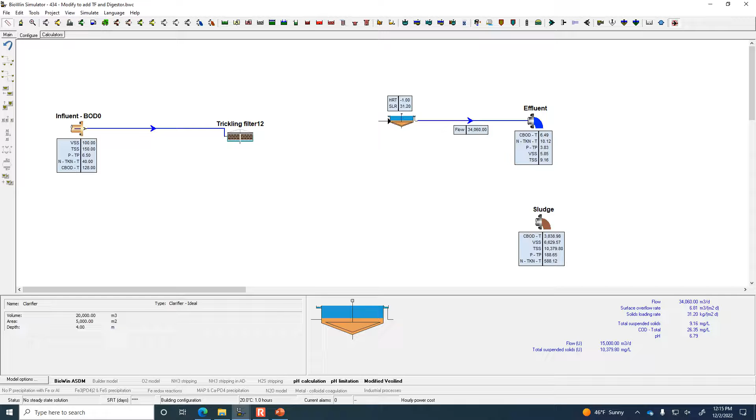So let's put the pipes in that are needed to the trickling filter, and then the underflow from the trickling filter up to the influent of the clarifier. Now, since I deleted that splitter, because we're not recirculating sludge, we have to connect the underflow from the clarifier directly to the sludge. And then I'm going to just drag that pipe down so that it's not in the way of the annotation I had added before. So your system should look approximately like this.

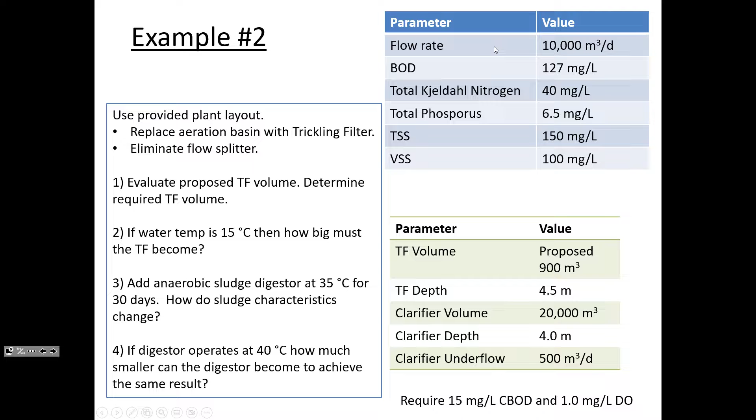The handout I gave you specified the parameters for the trickling filter that we want to do. So, it's basically all the same inflow except for the flow rate we need to adjust. I think previously it was in the 30-something thousand cubic meters per day. Let's reduce the flow rate down to 10,000 cubic meters per day. So that is an adjustment that we have to make here in the influent. Double click on it. Edit data, and it was 34,060 before. Let's dial down this flow rate to 10,000 cubic meters per day. All right.

Now, we had all of the pipes annotated, but when we deleted the pipes, those annotations were removed. So if we want that back again, we'll have to manually add it. So once again, I'm specifying below, tag the parameter, and what we want to have is the flow annotated. So add that to each of the pipes just so we can keep straight. I guess this system isn't quite as complicated as the flows since there's no recirculation, but it's still nice to see where things are going when there is a split. And we do split the flow going into that ideal clarifier. There's the underflow versus the overflow. All right, so we changed the flow to the influent.

If we look at the parameters here in this new problem where we've got the trickling filter, we want the volume to be 900 cubic meters. So go into the trickling filter by double clicking on it, and it has some default assumed value. I think that's 2,000 cubic meters. Let's see what's going to happen if we have 900 cubic meters. And we'll leave the depth of the filter the same.

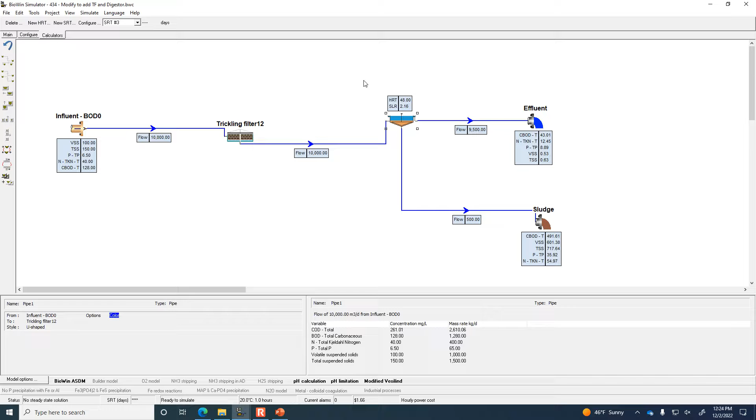Now, with this 900 cubic meter reactor, and we're leaving the clarifier volume the same, 20,000 cubic meters. The only thing we needed to change on the clarifier was the underflow. We're trying to get 15 milligrams per liter of BOD, and we want the water coming out of the trickling filter to be at least 1 milligram per liter of dissolved oxygen to make sure that inside of the clarifier things don't go anoxic. So let's calculate.

So under the Simulate tab, Steady State Balance, and since we're starting from scratch basically, like we haven't already done a previous calculation run with the trickling filter, we'll start with the seed file rather than with the current values. So starting with the seed, begin the calculations, and fingers crossed it can find a solution here. It did within 3 iterations.

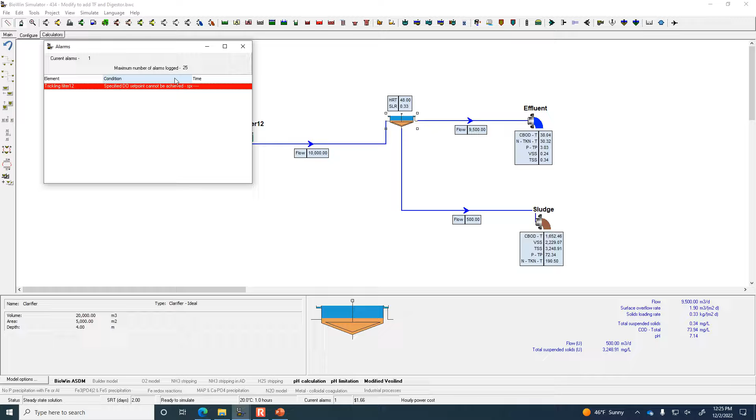Okay, but we've got alarms. Sometimes it just says solution found, but here it says solution found with alarms. So it's detecting that there's some sort of an issue, and we get this pop-up thing here saying the specified dissolved oxygen set point cannot be achieved. So something's up with dissolved oxygen. Let's hover over the trickling filter and see what we can learn.

If you see the cursor over the trickling filter, it's saying that the dissolved oxygen at the filter top is 4 milligrams per liter, but then 1.31 milligrams per liter in the middle of the trickling filter, and by the time the water gets down at the bottom, there's only 0.44 milligrams per liter of dissolved oxygen. So that's too low. The water going into the clarifier has so little dissolved oxygen that the rest of it will be consumed in the clarifier, and we'd have a layer of anoxic sludge at the bottom of the clarifier. So we need to make changes.

Either we need to increase the rate of the blowers that are providing oxygen into the trickling filter, or we need to increase the size of the trickling filter. And I think that we ought to go with the latter, because if you check the BOD of the effluent, it's also not meeting our required standard of 15 milligrams per liter. So this solution is a fail for 2 reasons. We haven't got the BOD that we need, and we also haven't got the dissolved oxygen that we need.

Okay, so 900 is too small. Let's see what we could do with 4,000 cubic meters for the trickling filter. Okay, so instead of 900 cubic meters, let's try 4,000 cubic meters. Okay, and then let's run the simulation again. Steady state balance.

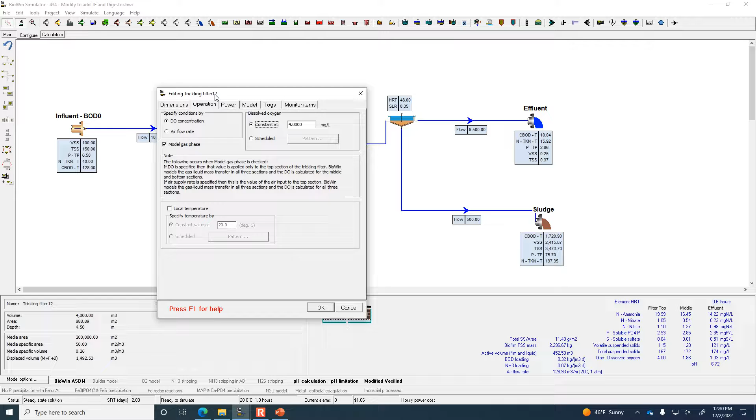Now, how would you actually achieve that if that wasn't the case of your flow that's coming in? You could have a pre-aeration step, a miniature aeration basin that doesn't have any recirculation of sludge, just to get it up to 4 milligrams per liter before it goes to the trickling filter. So we're just saying the flow coming in has 4 milligrams per liter of dissolved oxygen. So we're sticking with the 4,000 cubic meters.

The thing I want to know is how does the BOD change? Because, by the way, what was the BOD when it was rock? I don't know if it's already changed that. So with rock, simulation of 4,000, which is what we had to do to get the dissolved oxygen that's needed. So the BOD is 10. Okay, so I'm going to write this on the board just to keep track of it.

Rock media, the DO is 1.0, what was it? 1.03 milligrams per liter. And then the effluent BOD was 10.04 milligrams per liter. All right, so let's just see what effect we get sticking with the same volume but switching over to structured plastic. I don't know if it'll have any effect, but we've made the change, and let's run the simulation.

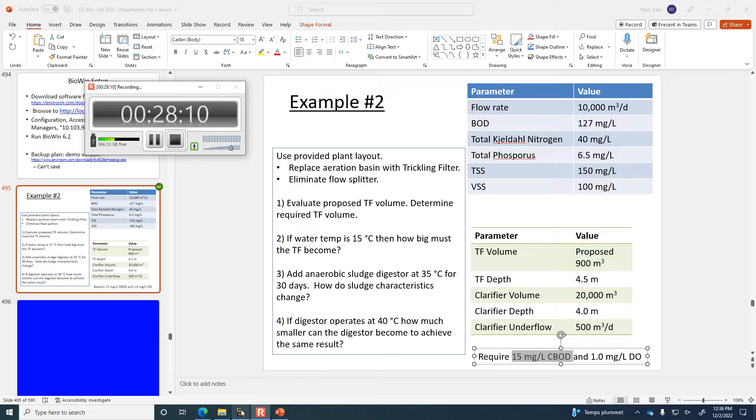I would presume that these microorganisms aren't going to be as efficient as they were at 20 Celsius. So how big does the trickling filter have to be to achieve 15 milligrams per liter if the water is colder? Okay, so I'm not going to narrate through. I'll just pause from my talking for a minute so you can work on that.

It's kind of interesting that reducing the temperature didn't actually affect the performance all that much. Taking it from 20 to 15, I got that the effluent BOD only goes from 10 milligrams per liter to 11.5. Did anybody else get similar values?

Yes. 11.5? So it didn't have much impact, although if you notice the dissolved oxygen in the trickling filter goes down a little bit. So we have a little bit of a slide, because it was at 1.03 milligrams per liter. Then it gets to 0.96 milligrams per liter for the dissolved oxygen. So the temperature sensitivity isn't so bad at 15 Celsius.

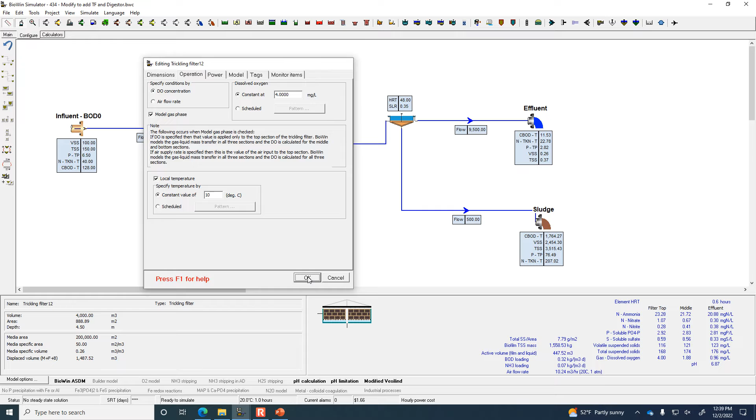I wonder if that would be the case if we continued to make it even cooler. Like if we took it down to 10 Celsius. I would have to guess that the reaction slows down as we continue to get colder, that the effluent performance is worse if the microorganisms are chilled and not consuming as much substrate.

Yeah. So when we took it to 10 degrees Celsius is when we see maybe a more noticeable reduction in the removal efficiency, because now the effluent is up to 15.5 milligrams per liter. So directionally, things are happening as we'd expect. As the trickling filter gets colder, so does the removal efficiency decline.

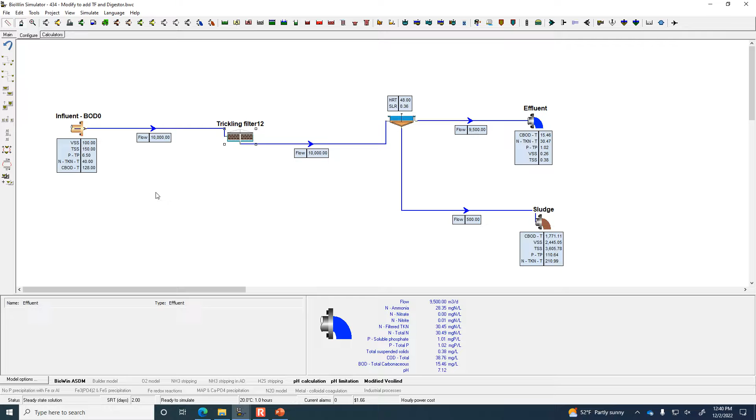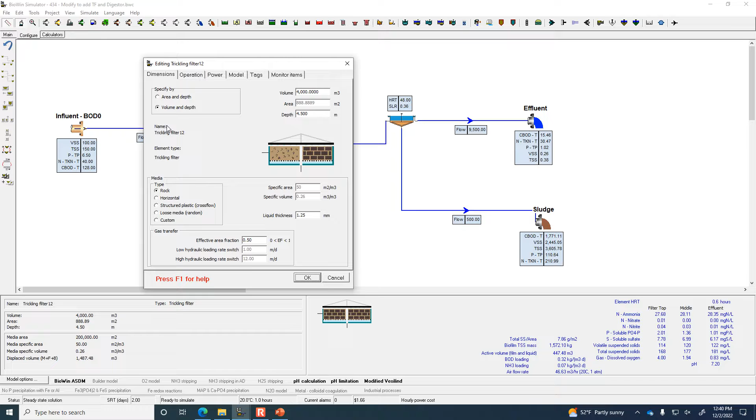With the 10 minutes that are left, what I want us to do is take a look at adding a digester, an anaerobic sludge digester. So I'm going to put the trickling filter back to its original temperature, back to 20 degrees Celsius. I'll just turn off the local temperature. And we want to digest this sludge.

So we have to delete the effluent that's there. I don't know if we can drop a sludge digester in an existing stream and it will split the stream. I haven't tried that, but let's try it now. So here's an anaerobic sludge digester. It looks like a cylinder with a little flexible gas collecting roof on top. It's next to the mixer. So digester anaerobic. Let's try dropping it.

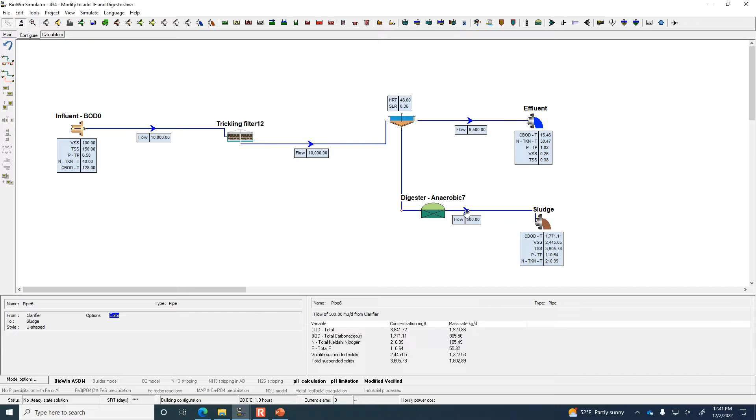I don't think it split that pipe. So I'm going to have to just select and delete that existing pipe and then connect the dots. All right, so connect the bottom of the clarifier to the inflow of the digester, and then the outflow of the digester we're connecting to the sludge. And then we can move the location of things a little bit to make sure that the diagram makes sense to us.

All right, so the water goes to the effluent, the sludge goes to the digester. Now let's double click on the digester and bring up its characteristics. So look at the sludge before, we haven't executed the model again. Before we add the digester, where are things at with the volatile suspended solids? So volatile suspended solids and the BOD, we want to see if we can knock those down a little bit with the digester.

So BOD is 1771 in the sludge before the digester, and then the VSS, volatile suspended solids, are 2445. Okay. So the problem statement says that we want to have the sludge at 35 degrees Celsius for 30 days.

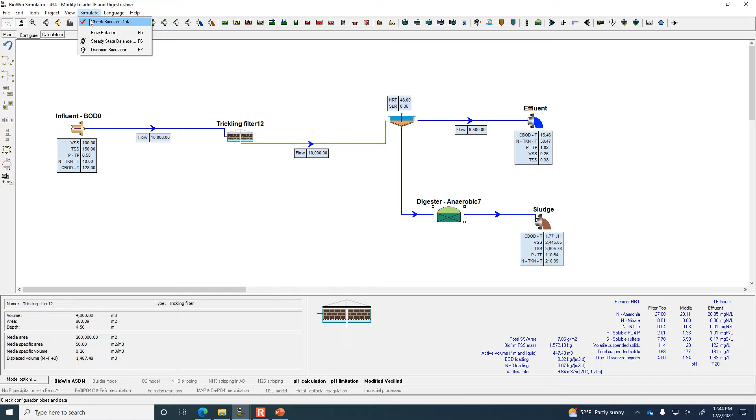Okay, so let's run the simulation again. So simulate steady state flow balance. We may get a new warning because we've added a new flow element about the hydraulic or solids retention time, but that's all right. I don't think we need to change anything there. Let's just see, how did the BOD and the VSS get affected by adding that digestion step, 30 days at 35 Celsius? What's happening to our sludge?

Solution found. All right, no warning message. Happy to see that. Wow, it had a really nice effect on both. The BOD went from 1,700 down to 200, which, I mean, you could feel good about land applying sludge if the BOD is down in that range. Volatile suspended solids went from 2,400 down to 700. So sludge digestion works, at least according to BioWin. That was at 35 Celsius.

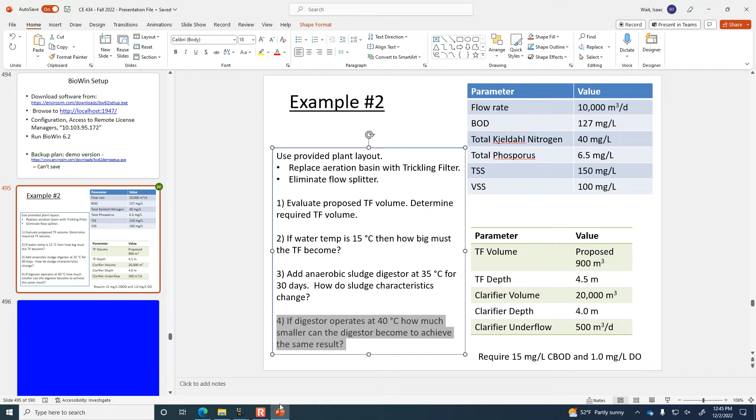Now, what if we warmed things up a little bit more? What if we warmed it from 35 Celsius to 40? The question is, could we make the digester smaller and still achieve this same result? So right now the result after digestion, the BOD is 204 and the VSS is 785. We warm things up in the digester to 40 Celsius. Let's run the simulation and see what kind of effect that has.

Should be even lower. And since it'll be lower, I think that could enable us to reduce the size of the digester, which would reduce the retention time. But remember that in anaerobic digestion, what you're trying to accumulate is a certain amount of degree days. So if it's warmer, you don't have to store it as long. It's just so perplexing. It takes so long to finish the simulation. There it is. All right.

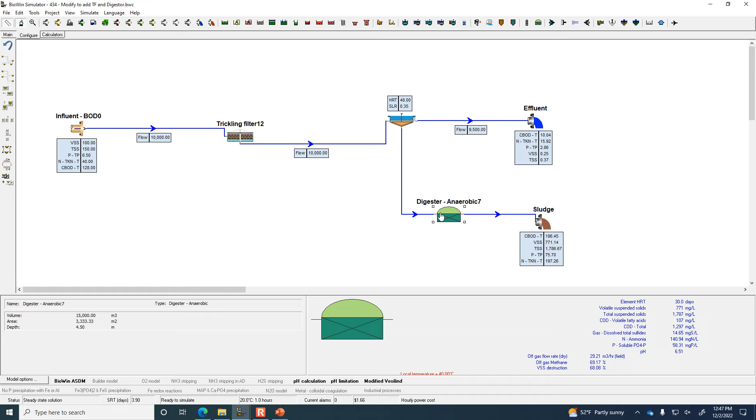So 186 and 771. It didn't change the VSS much to warm things up, but it did adjust the BOD a little. Not a lot. So we're not going to be able to reduce the size of this digester too much. We were at 15,000 before. I think if we go to 14,000, probably we'll be worse off than we were before.

But of course, you know that design is this alternating process of adjustment, investigate the effect, and iterate. So that iterative process of making a change, tinkering around, finding out if you make the digester smaller, you could save money, but then how does that affect performance? So I just took it from 15,000 cubic meters to 14,000 cubic meters. And let's see what happens with the BOD, because it's at 186 and we want to keep it around 204 by making the reactor smaller.

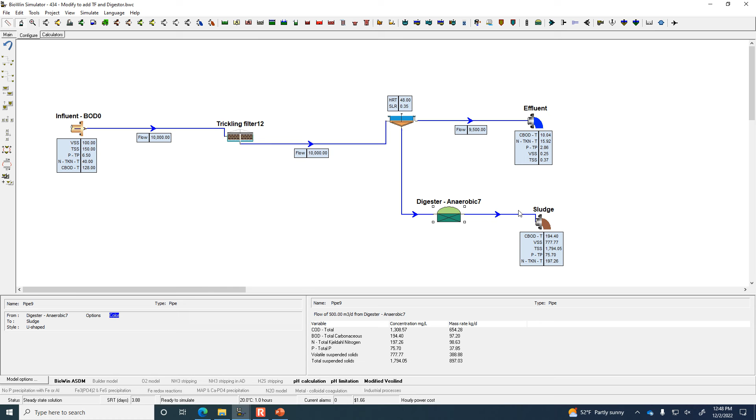Hers got really close at 12,500. 12,500? Yeah. Yeah, because I did 14 and it's not yet too high, so maybe we could go quite a bit smaller, 12,500.